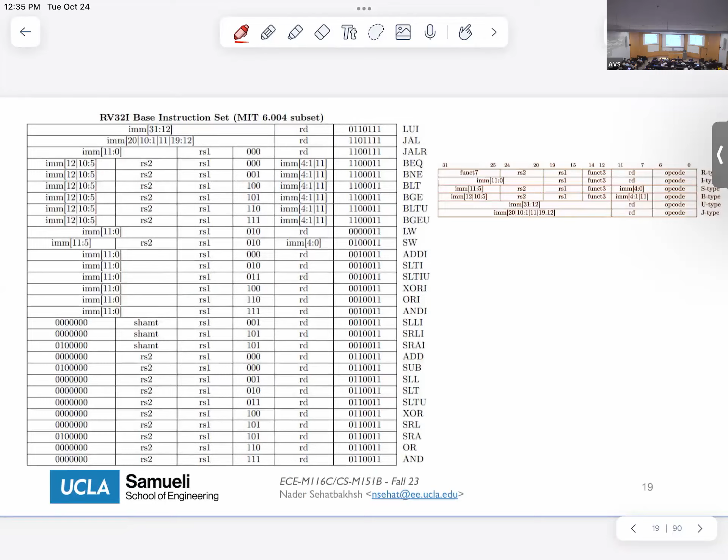The next step that we did was moving from ISA to machine code, and we said that we're going to use a standard table for RISC-V. This was the table that we looked at, and we said that essentially we have different types of instructions like R type, I type, S type, B type, J type, and each one has different fields, like an opcode; some of them have RD, some of them don't, and so on and so forth.

And again, probably during your computer assignment, you very thoroughly looked into this table, because there are different ways that you're decoding this. Again, if you have doubts and questions about this, let us know, and we can help you. So this is the main focus of our homework 1 and project 1.

Then we talked about the execution model, right? Okay, now we have the machine code, now what? And we said that essentially what we are doing is loading this machine code into the memory. In your CA1, this is your instmem file, the text file, which we load into the memory, and loading into the memory in your CA was basically reading this and writing it into some form of an array. And we call that an IMEM or something like that in your code.

And then afterwards, we were basically designing this, right? So the question becomes, how do we design this right part, which is the CPU? So the rest of our focus was designing this part. And then we gave you this big picture of basically what we have: a combination of 3 parts, a controller, a data path, and the main memory, right?

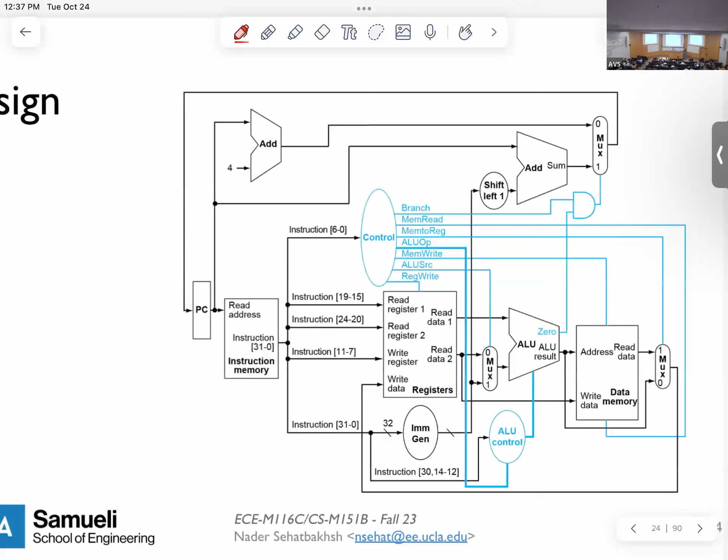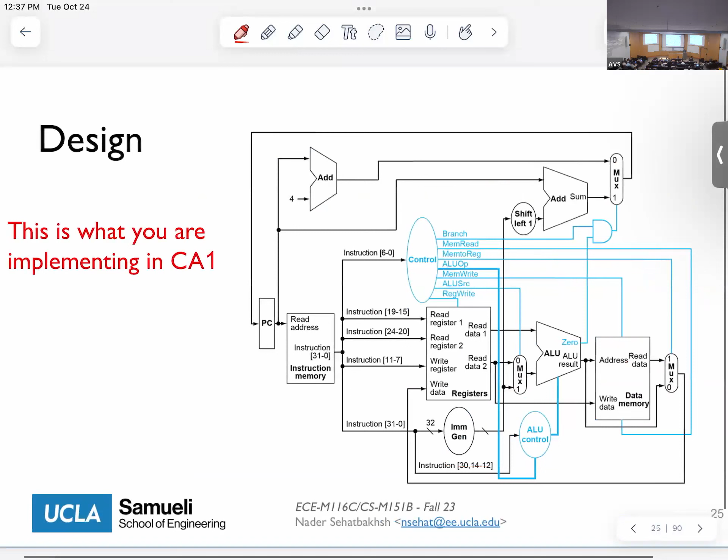And then we went through a detailed description of how we come up with this design, which was basically your CPU, a combination of these blue parts, which was your controller, and this black part, which was your data path. And again, this is the part that you've done in your CA1 and in your homework 2. So hopefully those 2 things are helpful in understanding this.

And another thing I want you to make sure that you understand correctly is what changes do I need to make to support a new instruction, okay? Because we always start with the core and then we add things to it in order to support more instructions. In the real world, that's how it works too. So I want you to be able, for example, if we give you an arbitrary instruction, to add to the data path such that you can support this.

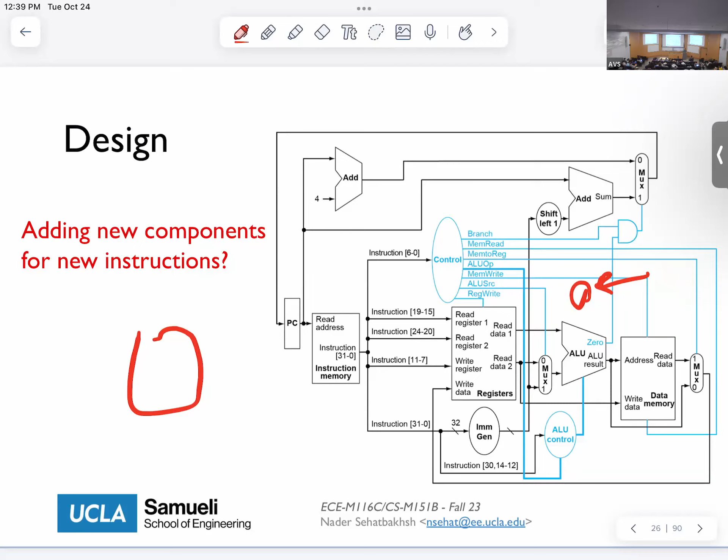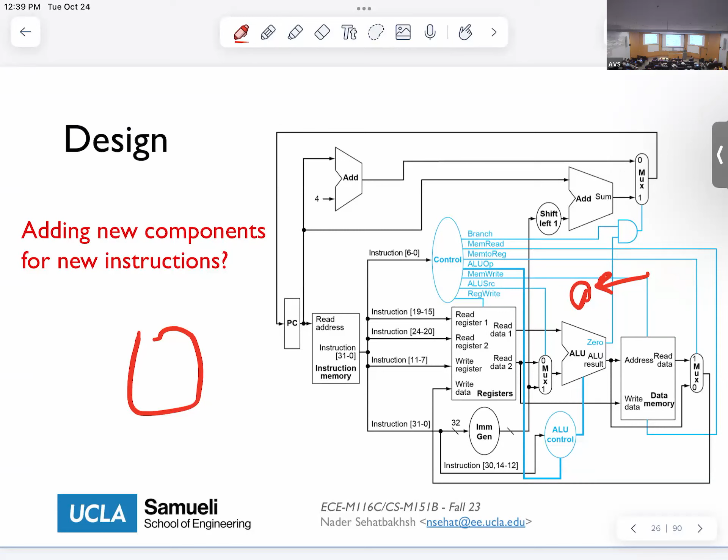Whenever you are thinking about how to go about changing the data path to support this new instruction, you have to always think about the minimal amount of changes. The less invasive, the better. For example, I can add another register file to fix some problems, versus I can add just a mux to fix the problem. And of course, comparing these two solutions, the mux is a much better solution because the cost associated with supporting this new instruction is much less. So always go for the absolute minimum amount of changes to the data path to support the instruction. That's another thing that I want you to remember.

Then we also talked about the data flow. That is, for a given instruction, can you calculate the data flow and the associated delay with it? For example, for load, we said that the path would be something like this, and then coming back here. And another path is, for example, from here to here, and so on. And then you need to compute the maximum of these paths, and that would be the delay associated with load. If you repeat this for other instructions such as add and store, you will find different delays, right?

So calculating this is important because it helps you understand how your data flow works, right? What are the units and which one is which? There are a whole bunch of good questions in CampusWire about how we calculate the delay for muxes and gates and so on. I recommend you read them and follow them and make sure that you fully understand them. Okay.

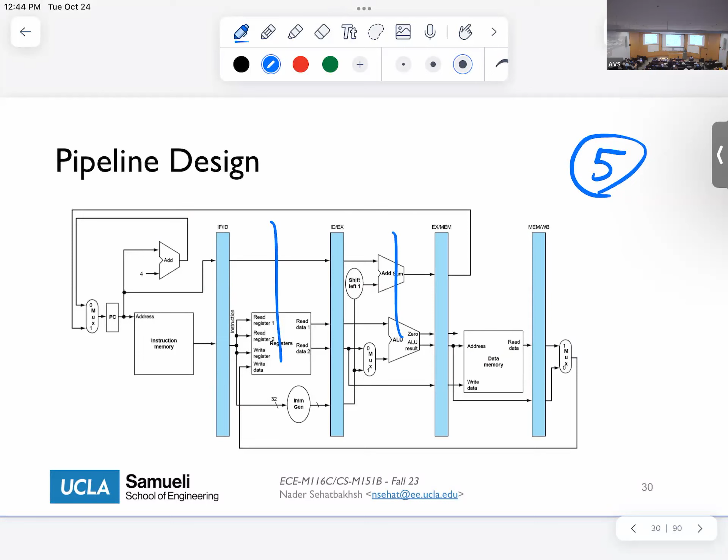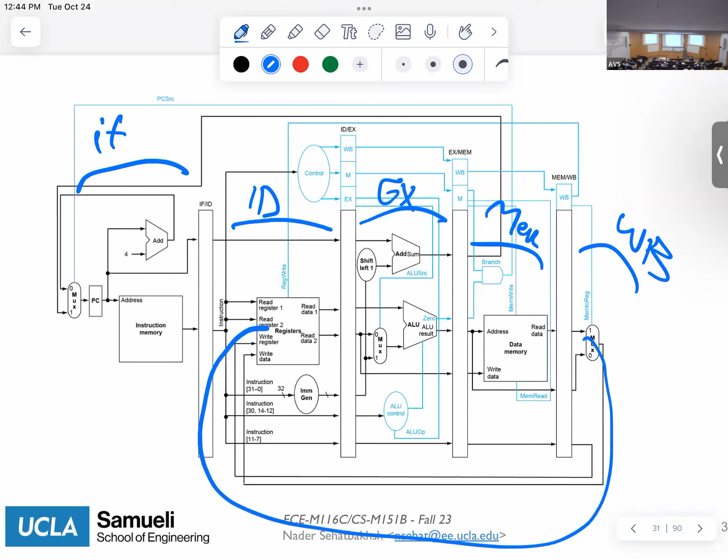So what we did was design your processor based on this. We call this instruction fetch, this instruction decode, or ID or D, this EX, the execution stage, this the memory stage, and this the write back stage. And this write back stage is essentially going back and writing to your register, right?

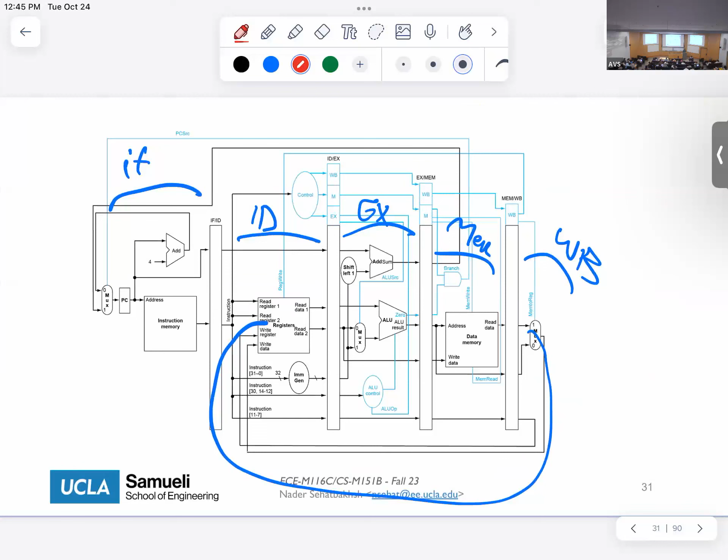And another thing that you probably notice is the way that we handled control signals. As you can see, we still make a decision about the control signal during the decode stage. But since now I have different instructions at different stages, I need to also push this control information into the pipeline registers. So I'm pushing this into here.

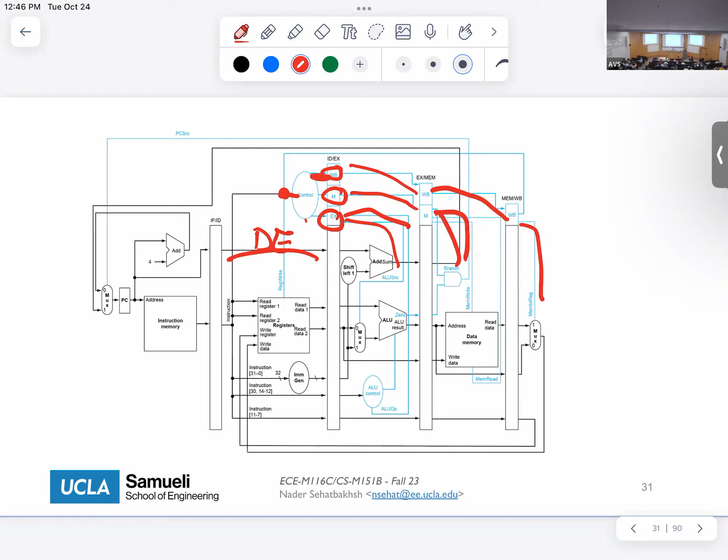I'm consuming some of it and pushing the rest into the next stage pipeline register, consuming some of it, pushing the rest, and then consuming this part as well. So this is the way that we're going to handle this design. And then you see that, for example, I move this AND gate here and so on. These are all for making sure that these stages are equally balanced in terms of the timeline, right? So this was one thing to notice.

Another thing to notice is the wiring for your RD. This was the part that I emphasized a little bit more. If you look into this part, you'll see that what is connected to my RD is not directly coming from this instruction. It's actually coming all the way from the pipeline registers, because this is the RD that is coming from the write back stage and not from the decode stage.

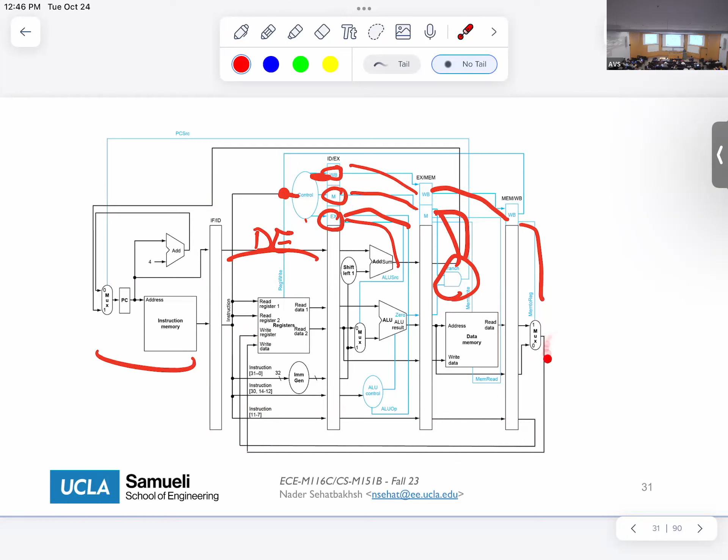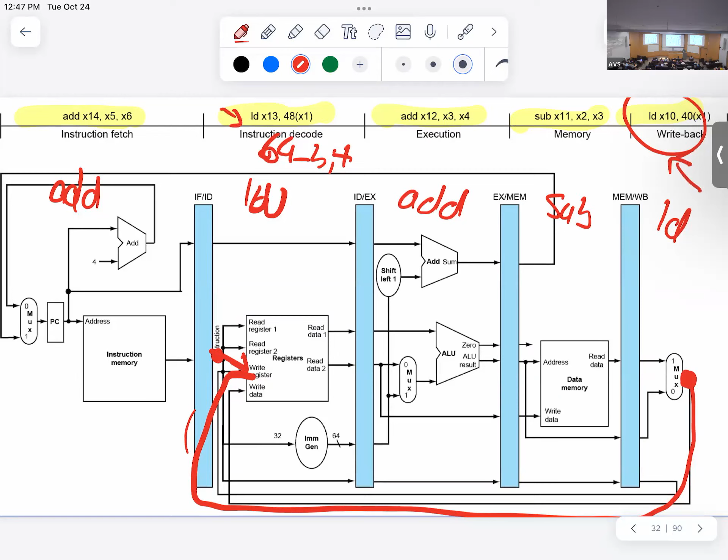Because given this example here, you want to write back from this instruction. So you want to get this value to be stored. That's why it's coming from here instead of from here. Because if it's coming from here, it would have been this load, but I want this load, right? So you see that it's actually a correctness issue if I don't do this. All right. So this was the beginning of the story of the pipeline.

But unfortunately, what we saw was that although the pipeline design is straightforward, there are a whole bunch of problems that we need to fix. The biggest problem was the RAW data hazard: I'm writing to a particular register, and within a few cycles, I'm trying to read it. If you look at the timeline, the write happens during this cycle, versus if I want to read it immediately, I'm expecting the value to be ready at this cycle. So 2 cycles before, and that's the problem, because the value has not been updated.

And I told you that this RAW data hazard is not just between the first and second instruction. It could also happen between the first and the third instruction, okay? In this case, again, the write is happening here, but I want to read it here. So there are two possible RAW data hazards that might happen, right? But then the last thing I asked was, do we have a RAW data hazard between the first and fourth? And the answer to that was no.

The reason is the concept that we call half cycle: you're writing in the first half of the cycle, but you're reading in the second half. If you look into this gray shaded area here and here, you will see that the write is on the left half and the read is on the right half, and these two don't overlap. So you can write and read in the same cycle. That's why there is no RAW data hazard in this green part.

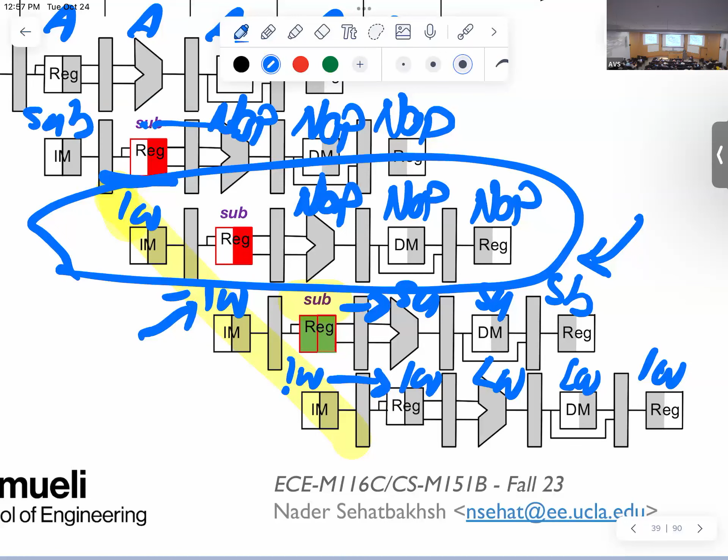Yeah. If we were to draw this, we would draw the first and the third, but would we draw the middle two, or would we just say, okay, for the sub instruction, we have IM where instruction 2 currently is, and then just put 2 bubble spaces and then the rest of the instruction? Oh, in terms of how do you write this? You can either do it this way. I think the microphone captured your question, so I'm not going to repeat it.

But basically, for example, in your homework 3, the way that I ask you to do it is like this. So if this is fetch, decode, execution, memory, write back, I ask you to do add, and then in this case... Actually, no, let me do it this way. So this was fetch, decode, execute, memory, write back. No, sorry. This was cycles, so this is 1, 2, 3, 4, 5, 6, and so on. So these are the number of cycles.

And this is your add, this is your sub, this is your load. In your homework, you should write it this way: you do fetch, decode, execute, memory, write back. For this one, it doesn't start here, it starts here, fetch, decode. And then since you have to stall, you do something like this, and then execute, memory, write back, and so on. And for the load, the fetch stays here, stalls, decode, execute, and so on and so forth.

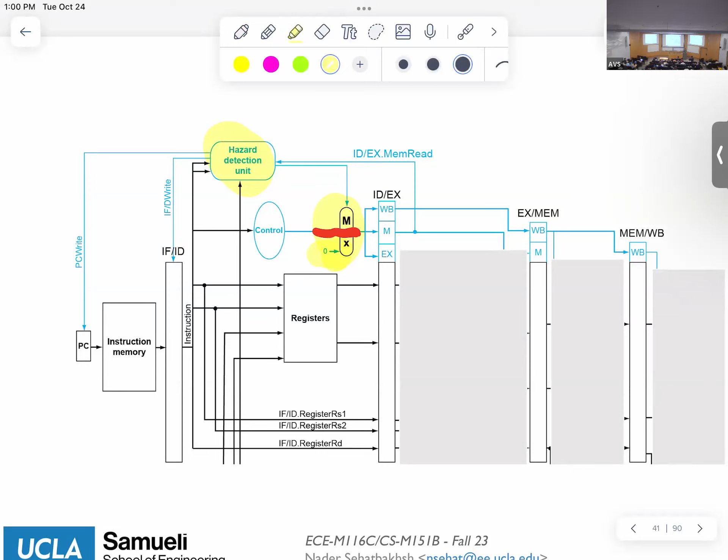So all 0 instructions. So instead of sending the actual control signal, I'm passing through zeros to my pipeline. And this goes through the execution, memory, and write back. This is where we're going to insert my nops.

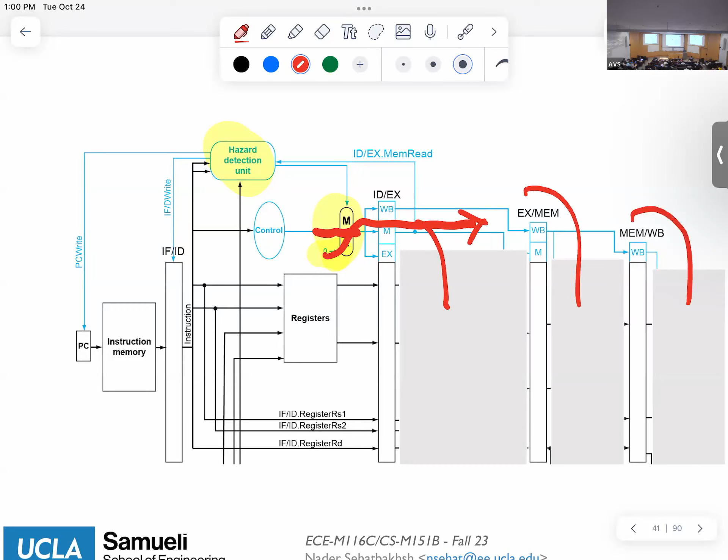So this is the first thing that we are doing. The additional two things that we are doing are these two additional control signals. One is this PC write, and the other one is this IF/ID write. So what are these two? These are write enables, okay?

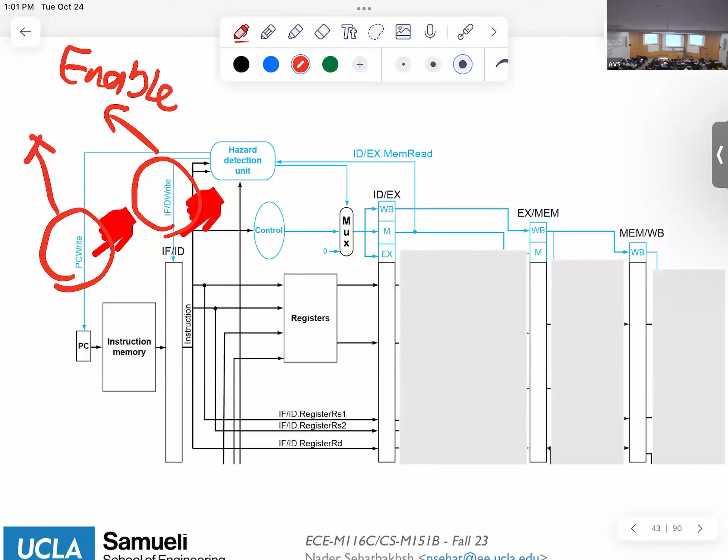So these are write enables, which means that they're telling the registers don't update, because if you remember in this example that I showed you here, what basically we are doing during the stall process, we are keeping these two instructions in the same cycle. So load stays in the fetch stage and sub stays in the decode stage, right? So basically you're telling the registers don't update because you want to keep this in the same stage, okay?

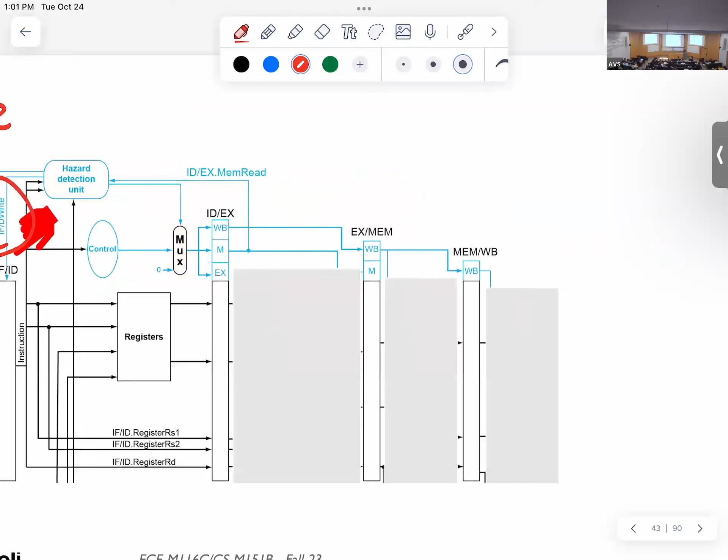So how do we do it? We do it using this trick here, that we're adding these two write enables, and we make them equal to 0. When the write enable is 0, it means that this value won't get updated, this value won't get updated, which means load stays here and the sub stays here until we tell them now you can move forward.

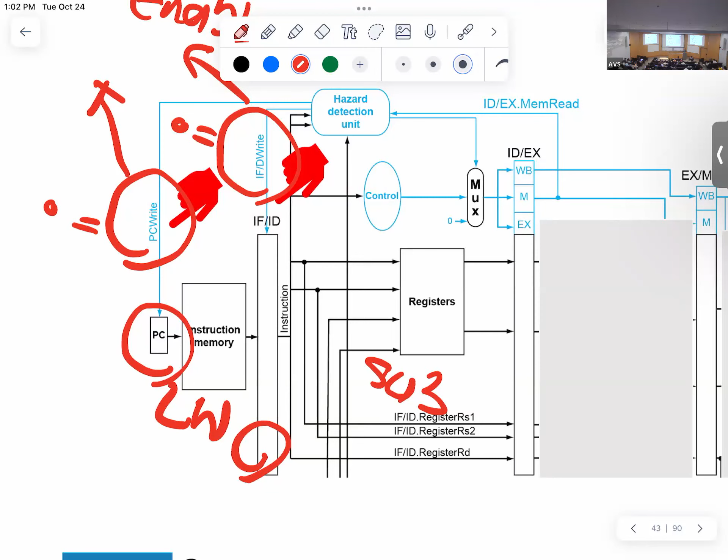Question? That only stalls both the fetch and decode stages, right? The fetch and decode, yeah. It's like a hazard where you only need to stall for one cycle. So the question is, what if you just want to stall for one cycle? For these particular scenarios that we have in our design, you always stall for both. You stall both fetch and decode.

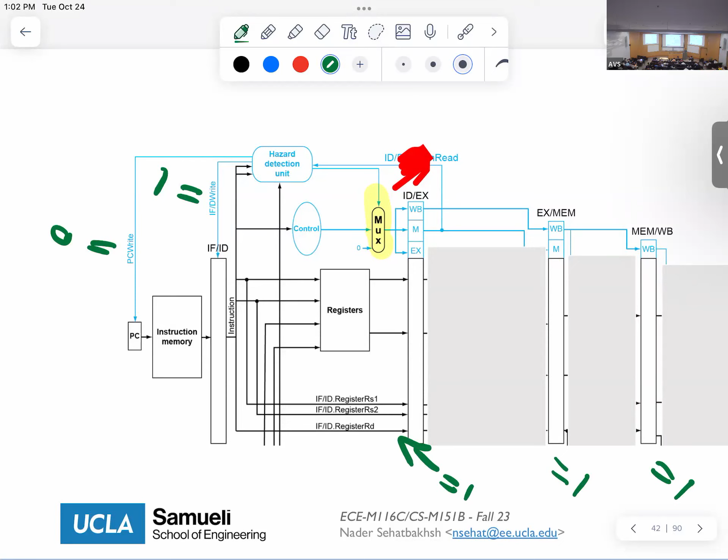If there is another design where you would have wanted to do this, then you probably would have had another signal, something like this. Or you could just basically do the simple thing that this becomes equal to 0, but this becomes equal to 1. So you stall one and then you let the other go, right? So it's the same story as here, right? The write enable for these are equal to 1. I'm just pushing the bubble inside. So you probably need to push some bubble and then let it move forward, right? But essentially these are control signals, so you have full control over them, right? Okay.

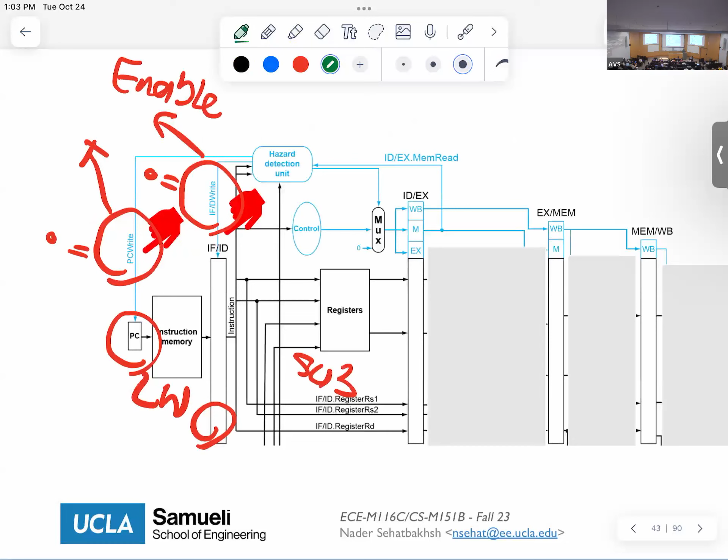So going back, this was the first option that we talked about, stalling the processor, but of course we can do forwarding. The good thing about forwarding is that you don't need to stall, so your IPC or CPI isn't impacted. So how do we do the forwarding? We either forward from the beginning of the memory stage to the ALU. So if there's a scenario like this, I have the correct value of X5 here, so I can actually forward it from here to the beginning of my ALU. So I read the incorrect value here, so I fix it by forwarding from here.

There's also another option for forwarding when there is a dependency between this instruction and this instruction. In that case, I'm forwarding at the beginning of my write back stage, again, to the inputs of the ALU. So I read the wrong value here, so I'm fixing it like this, right? So this is how the forwarding happens. How do we implement this?

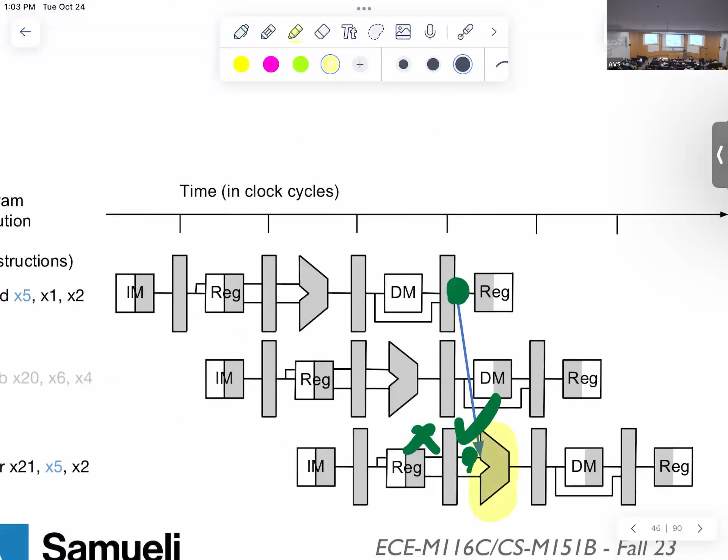You're adding these two muxes before the ALU stage. Remember, I told you that we are forwarding at this point here. This is basically this design here, right? So I'm adding these two muxes that essentially get the default value, and then these two values. And if you look at where these two values are coming from, one of them is coming from here, and one of them is coming from here. This is the beginning of the mem stage. This is the beginning of the write back stage.

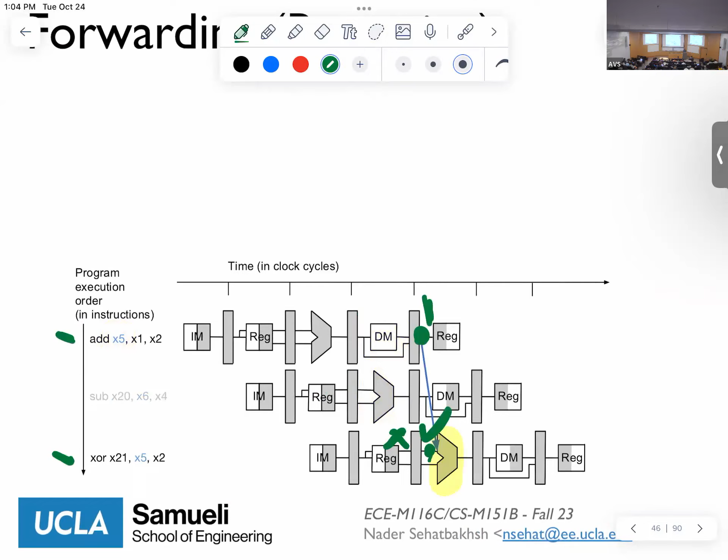Again, if you look at this, this is one option for forwarding here. And then this is the other option for forwarding. This is how we are doing it. From here or here goes into these muxes. Who controls these muxes? These control signals that go into this forwarding unit. So this forwarding unit basically checks some condition, which I'm going to describe.

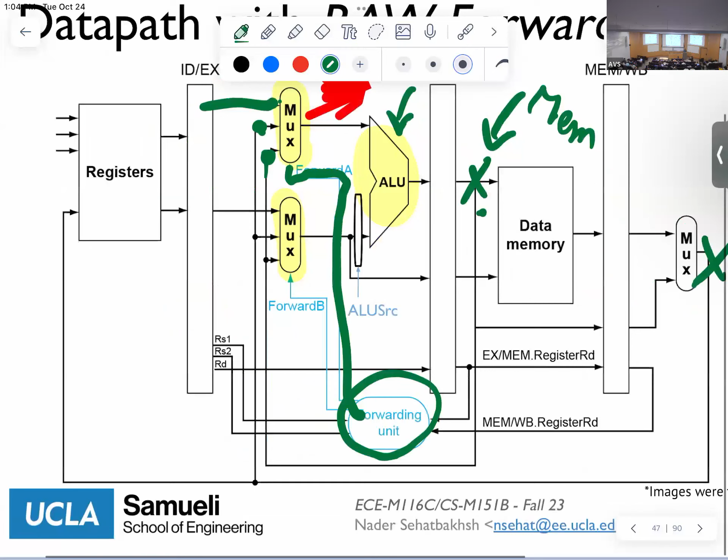And then this forwarding condition basically tells whether you do your default operation, which is this signal, or whether you need to forward from mem, or whether you want to forward from write back. So one of these can help you make a decision, right? The important thing is that, as I said, you either forward from mem or write back.

So you either have this signal or this signal. And then, as you can see, the forwarding could happen for either of the source registers, so either this one, or even both of them. Sometimes you need to forward both registers. That's why you have two muxes, okay? There's this mux and there's this mux. There's a control signal called forward A, and there's a control signal called forward B. These are independent from each other, so you can forward to one register or to another register or to both of them if you want to, okay?

So what are the conditions? The conditions, as I said, are if the RD of the instruction in the memory stage is the same as either RS1 or RS2 of the execution stage, or if the RD of the write back stage is the same as the RS1 or RS2 of the execution stage. And you also need to check the reg write, because you want to make sure that this is indeed an R-type or I-type instruction. So again, if you look back, this is how we implement this. This is RD, this is RD, this is RS1, this is RS2, and this is how we actually make this decision, okay?

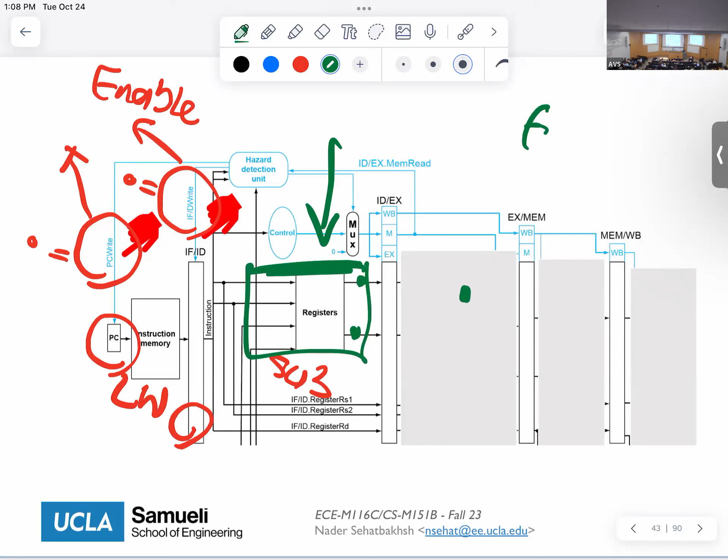If I show you the implementation, it will look something like this: I have this hazard detection unit that takes these control signals and issues a stall if I see a load use data hazard. Then afterwards, I can do the regular forwarding once things move into the next stage. So in addition to forwarding, I do the stalling. That's why you have both your hazard detection unit and forwarding unit together, and this will help you do both stalling and forwarding at the same time.

If you look at the conditions for load use, I'm checking if the RD of the execution stage is equal to RS1 of the decode stage, okay? So looking at the data hazard, I'm taking these two signals, RS1 and RS2, and pushing them into my hazard detection unit here. Another thing I'm checking is the RD of execution, so I push this into my hazard detection unit too. RD of execution, RS1 and RS2 of decode all go into my hazard detection unit. If it detects that these conditions are true and mem read is also equal to 1, which is another input to the unit, then I'll issue a stall, right?

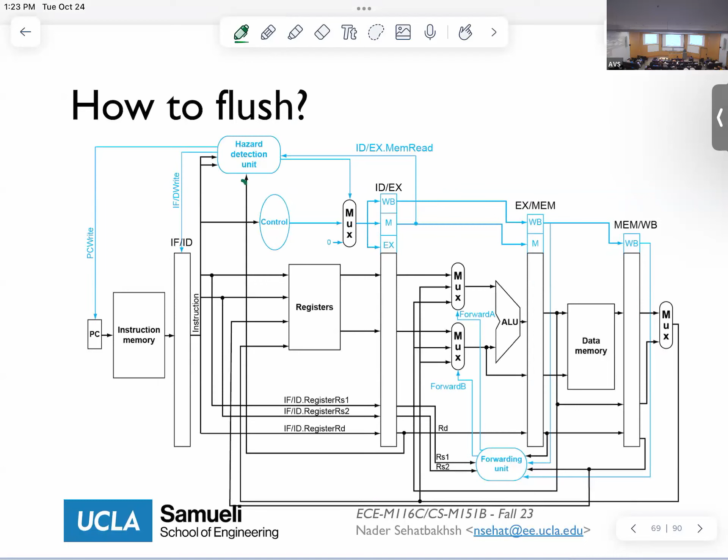So this was basically our initial design for hazard detection and forwarding. We are essentially introducing these additional muxes that basically continue doing what we did here. Remember this was the method for flushing things, for inserting a bubble here. So let's do this for this cycle, and this cycle as well.

Okay, so at this point, for example, here it was I1, here was I2, and here was I3, right? And I need to flush all 3 of them. So instead of pushing I3 to the pipeline, I'm replacing it with 0. So at this point, I'm flushing I3 and replacing it with a bubble when it goes to this cycle. Same story when this goes to here, I'm replacing it with this mux, so I'm pushing a bubble here. And then same story for this one, instead of pushing this, I'm pushing a bubble here.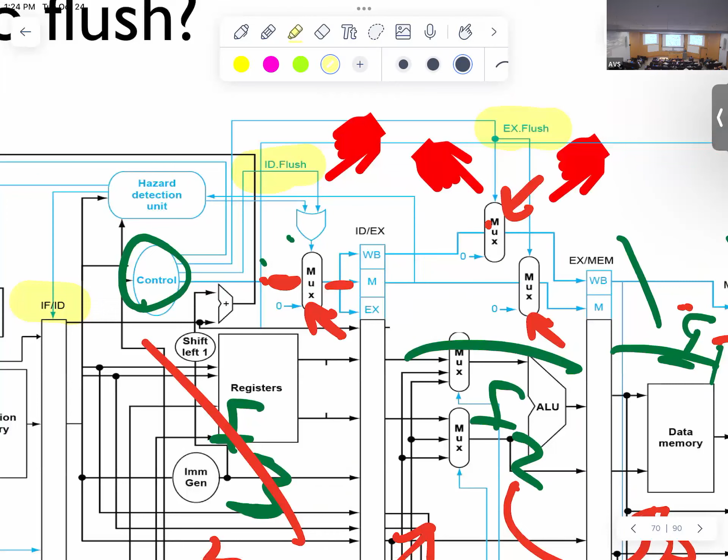So as you can see, I'm essentially replacing my control signals with 3 muxes, 1 here, 1 here, and 1 here. And you see that this control signal is called ID flush and EX flush that creates the flushing for decode, execute, memory, and write back. So this is in addition to all things that we have. We still have the flush, IFID, and all those things. But here now I need to flush things that I'm reading to this.

And another thing that I need to do is that if I need to flush the fetch, I also put this IF flush as well. So I'm flushing here. This is for my decode. This is my execute. Sorry, this is my memory. This is my write back. And then I need to fetch the correct instruction. So this also needs to flush this instruction from reading the incorrect instruction from here to here.

Because if I go back here, at this point, I would have read I4, which is also an incorrect instruction, right? So I need to make sure that this is actually I correct, whatever that is, which is not I4. So this is why I also have this IF flush here, to make sure that I'm not pushing the incorrect instruction from here to here. That's the idea of all these 4 flushes. We are replacing incorrectly fetched, decode, execution, and memory and write back instructions with bubbles, basically, right?

And these all happen again with the hazard detection unit, okay? The hazard detection unit is the one that detects these problems, and then it's inserting the bubbles or stall. You can think about flushing as some form of stalling, right? So it's pushing this into the pipeline. So this was the baseline design that I described to you, where I don't want to do any sort of prediction. I'm just doing a not taken prediction. I make a mistake, so I need to pay the price of 3 cycles, right?

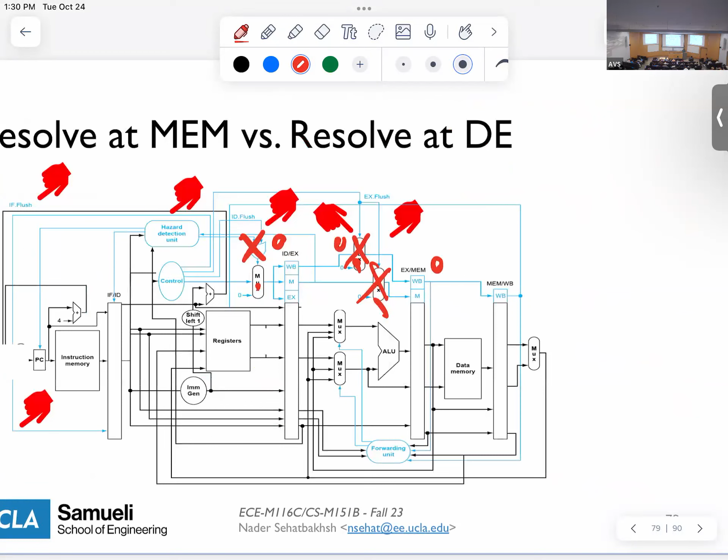So these checks used to be at this stage. So we use the ALU at the execution stage, and we use this branch instruction at the mem stage to fix this, right? But what you can do here is, instead of using this, if I add this comparator here, then I know the outcome at this stage, right? So I know it here. So instead of using this, I'm adding this here, and that helps me resolve the branch.

I think during the decode stage, we want to basically have all the inputs ready for the hazard detection unit to know if it's a hazard. And then by the end of the cycle of the decode, the hazard detection unit has all the inputs and sends out all the correct control signals to flush already. So then on the next cycle, the IF/ID stuff is going to flush also. You're going to have to extend the cycle a little bit, or I guess if the data memory access is long enough.

I'm not sure if I catch the question. So yes, we have all the control signals at the end of the decode stage. So when it's pushed to the next stage, then we can use this correct instruction. The only thing is that I need to flush one instruction that used to be in the IF stage, and now it needs to go to the decode stage, and that's where we're going to have this IF flush that goes here. Okay.

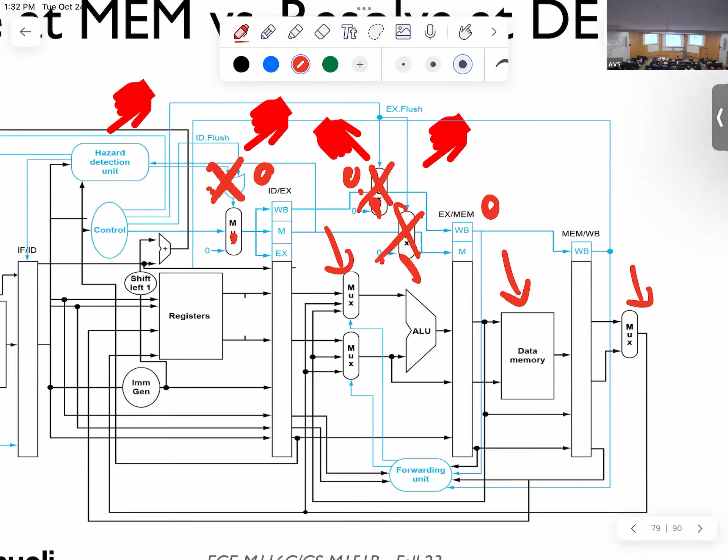Let me actually give you this example, then I'll come back to the questions, okay? So let's, for example, have something like this. I have a sub, I have a branch, and then I have a bunch of instructions, and this branch is going to jump to this instruction at 72. So I'm going to skip all of these instructions in between and jump here. So let's say that this branch is going to be taken. What will happen? So this is kind of like our pipeline stage at this moment.

So I have my sub, I have instruction before sub at the memory and write back, I have my branch, and I have my AND here. So how do I get that? So this is instruction before sub. This is 2 and 1. So this would be at the write back stage. This would be at memory stage. This would be at the execution stage. This is at the decode stage. And since we are doing not taken prediction, this will be at the fetch stage, right? So this is how it works. So branch decode, sub here, before 1, before 2, right?

So at this point, we predicted not taken. That's why we fetched this AND instruction, right? But we made a mistake. This branch is supposed to be taken. So what are we doing? We are pushing this branch to move forward. We'll let this sub move forward. The 2 was already finished. So 1 goes to the write back. And we used to have AND here, but since this is not taken, I need to flush this. So I need to push a bubble here.

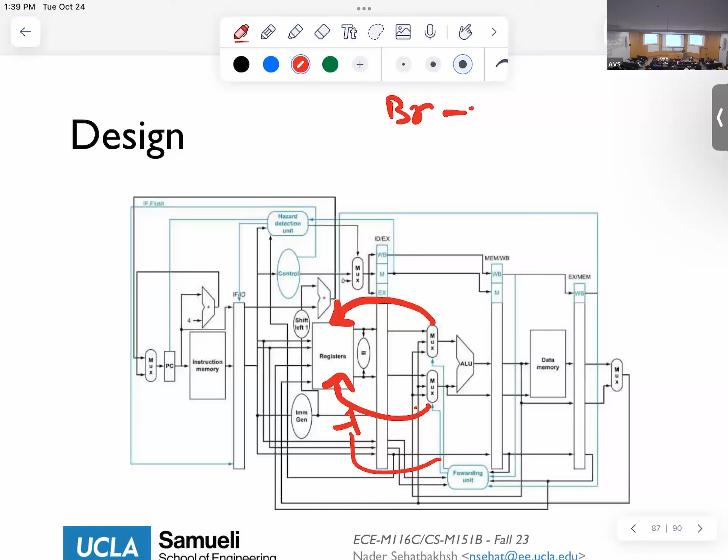So again, to summarize, you have various different options for branches, okay? You can stall at the memory stage, you can stall at the decode stage, you can predict not taken at the memory stage, or you can predict not taken at the decode stage. So these are the 4 options that you're going to have. Depending on each one, the number of stall cycles and forwarding might change. So just be careful about the differences between them.

Of course, the fastest among these is this one. The slowest among these is this one, right? So this is what we usually do in a modern system: we resolve at the decode and we predict not taken at the decode as well. Okay? Any final questions?

You know how we have the offset being shifted by 1 to the left, which multiplies it by 2? How does that affect how we write our assembly? How do we calculate which is the right instruction to jump to? For example, I know I want to jump to 72, how would I write that? Do I have to subtract from the label and then divide by 2 to get the right number for the assembly code?

Yeah, so the question is, how do we do this? So remember that this number needs to be shifted left, right? So you multiply this by 2, and then you add it to your base register, which in this case is your PC. Multiply by 2 plus the PC, that gives you the address that you need to jump to. So when we're implementing a branch and we take in that binary, it shows us the offset, and we compute it by multiplying by 2, and that gives the right instruction?